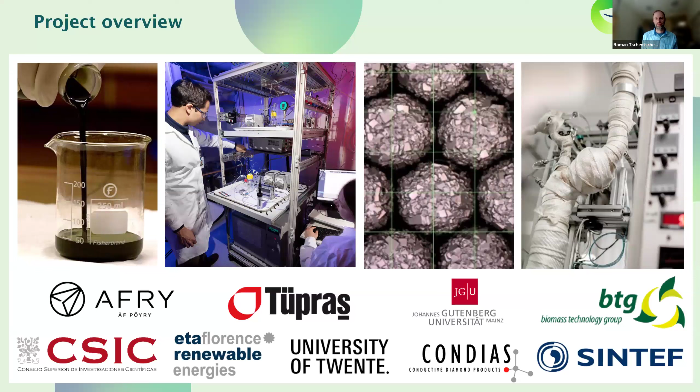In this webinar, we will talk about the last part of the value chain of EBIO. As most of you already know, in this project, we use electrochemical methods to turn bioliquids into fuel precursors, and then we co-process them using refinery technologies into fuels. And we have had 2 webinars in April and May, which were dealing with the bioliquids themselves and with the electrochemical conversion. And today we have the final webinar of this series dealing with the refinery operations and co-processing of

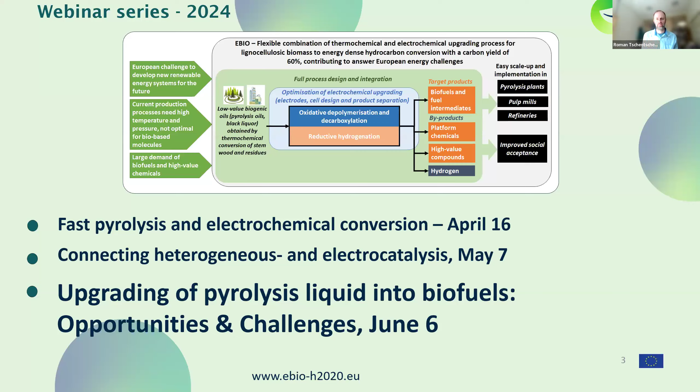those upgraded bioliquids. As Emma already said, we have 2 presentations and 3 speakers. The first presentation will be given by Seda and Can from Tüpras, and then the second one by Yannick from ITQ. And we start with Seda. Please, Seda, the floor is yours.

Thank you, Roman and Emma, for the introduction. Welcome you all to the third webinar of the EBIO project. I am Seda Karahan from Turkish Petroleum Refineries. I am the product owner of the renewable fuels at R&D department. Today, together with my colleague Can Güvenç and our project partner from CSIC-ITQ, Yannick Mathieu, we will have a look at pyrolysis liquids from a biofuel point of view.

Let me give you a brief introduction about Tüpras, which is a refining company producing the energy of Turkey for almost 70 years. Together with over 6,000 employees in 4 different refineries and headquarters in Istanbul and trading office in London, it is the largest enterprise of our country. After its first establishment in 1955 as a public company, its privatization to Koç Group occurred in 2005. By the investments after that point for both modernization and the residue upgrading, which was completed in 2014 in Izmit refinery, today Tüpras has 30 million tons of crude oil processing capacity.

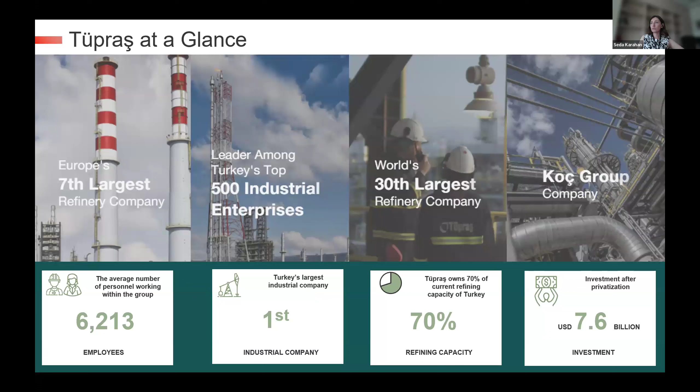For the transportation of crude oil to 4 refineries, which are located in Izmit, Izmir, Batman and Kırıkkale, in addition to the pipelines from Iraq and Bakü-Ceyhan, Tüpras has some subsidiaries, Körfez Ulaştırma and Ditaş, for railway and maritime logistics. OPET is our associate for the distribution of value-added products through 5 different terminals and many stations all over the country. By the trading office established in 2018, our sales limit expanded and we ensured that our products reach 15 countries. And 2 years ago, by holding the shares of ENTEK, which is a zero carbon electricity company, Tüpras took a pioneering step through strategic transformation.

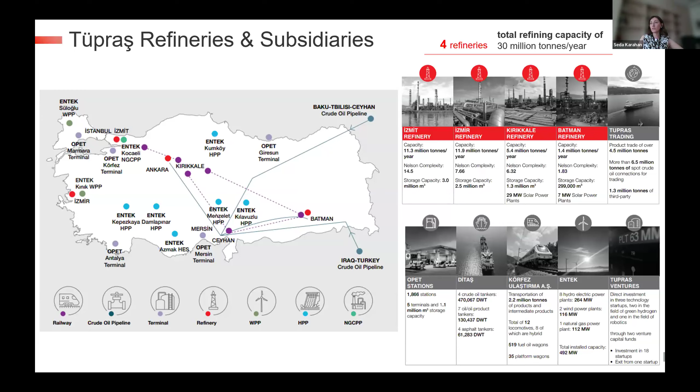In 2021, with the Paris Agreement signed by Turkey and the announced 2053 net zero target, Tüpras initiated its transformation plan by taking steps regarding changing demands and environmental concerns, focusing on 4 main areas, which are biofuels, zero carbon electricity, clean hydrogen, and sustainable refining. Tüpras declared its transformation plan 2 years ago. As the first phase of its investments for biofuels, especially sustainable aviation fuel, Tüpras signed a licensing agreement with UOP Ecofining HEFA technology, which relies on waste vegetable oil and fats. The estimated capacity will be 400,000 tons of feedstock annually.

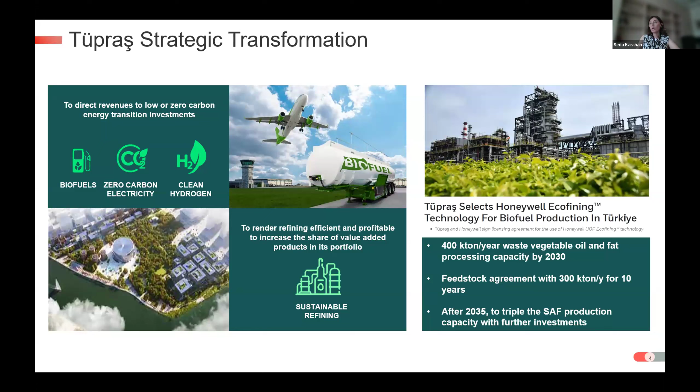We are also looking for some other alternative technologies to triple this SAF production capacity after 2035, taking a role as R&D department for the exploitation of these new routes and the development of new methodologies. At the R&D Center, which is located in Izmit Refinery, there are 68 employees, the majority of them researchers. In addition to biofuels, we have many completed and continuing Horizon-funded projects in the frame of research focuses such as CCUS, circular economy, commercial and digital solutions.

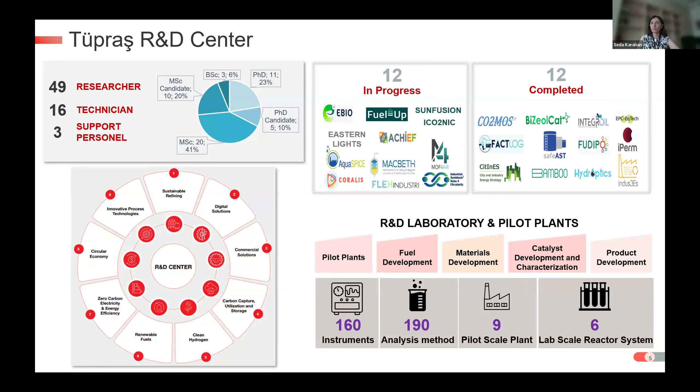Besides EBIO, we initiated another demo scale project, which is Fuel Up, at the beginning of this year, also aiming at the conversion of woody-based pyrolysis liquids into both aviation and marine fuels. And we have 2 newly funded renewable fuel projects relying on microalgae and microbial oil generated from CO2, which are Sunfusion and ICO2NIC.

Here I would like to continue with describing the share of the transportation sector in global GHG emissions. Industrial sectors, including production, energy, and transport, account for over 40% of global GHG emissions. And total global emissions have unfortunately reached 50 billion tons of CO2 equivalent. The transport sector is responsible for 16% of all emissions.

Aviation is one of the 6 hard-to-abate sectors, like cement, steel, plastics, and shipping. Aviation takes part by 2 to 3% for now, and according to the European Commission, by the middle of this century, the demand for flying could increase and the GHG emissions will reach more than 3 times compared to 2005 levels. Although this increase has been temporarily slowed down by the effect of the COVID-19 pandemic, it is recovering very fast. And in the last years, aviation emissions have already reached 80% of the 2019 pre-pandemic peak.

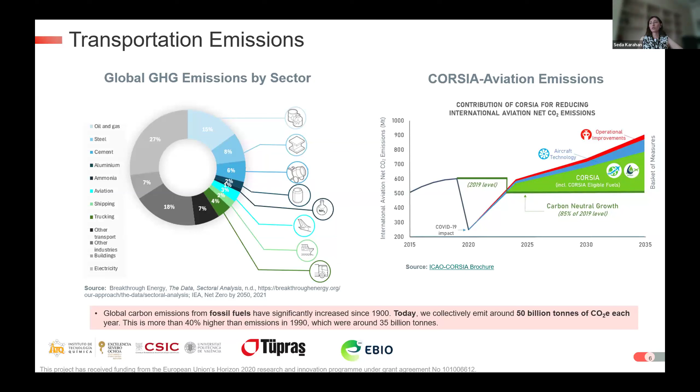According to CORSIA, which is a carbon offsetting and reduction scheme, it takes as the baseline reference 85% of the emissions of 2019. Precautions for aviation can be collected in 3 fields to stabilize the emissions at that level. These are operational improvements, aircraft technologies, and clean fuel technologies. To draw back the emissions to baseline, the estimated contribution of these technological advancements and operational improvements is very limited without sustainable aviation fuels. In addition to sustainable aviation fuel, there are other alternatives like hybrid electric and hydrogen that can pave the way for decarbonization of aviation, but especially for commuter and regional jets.

The reason why batteries are limited to shorter distances is their volumetric energy densities. That's to say, a plane would need more than 50 kilograms of batteries to replace just 1 kilogram of kerosene, which is jet fuel. And they can be used for a maximum range of 500 kilometers to 1,000 kilometers. While the mass energy density of hydrogen is higher than kerosene, liquefaction is required for both safe distribution and storage purposes.

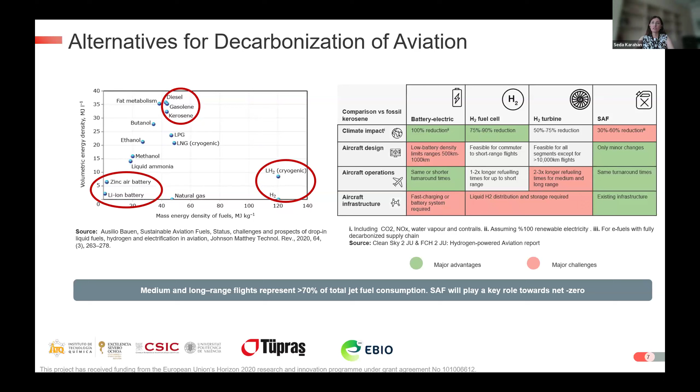On the other hand, SAF is a kind of liquid fuel already, and it is both chemically and physically compatible with its fossil jet counterparts, and therefore it is the most promising way of decarbonization. Also, considering that 70% of jet fuel consumption already comes from medium and long range flights, SAF is the major solution for aviation.

In Europe, pursuing the ambition of being a global leader to accelerate independence from fossil fuels, the European Commission completed the adoption of the Renewable Energy Directive, and the third version entered into force last November. By the new directive setting the targets and obligations in many sectors, the renewable energy use target in the transport sector by 2030 was increased to 29%, or alternatively a 14.5% GHG reduction must be ensured. Although the previous versions covered road and rail transport, now it is extended to all transportation sectors, including aviation and maritime.

Together with a mandate encouraging the use of advanced biofuels from Part A feedstocks, which are mainly non-food biogenic feedstocks. Also, the cap for the use of Part B feedstocks, which are used cooking oil and animal fat, the sources which HEFA relies on. This cap, 1.7%, is retained in this version also.

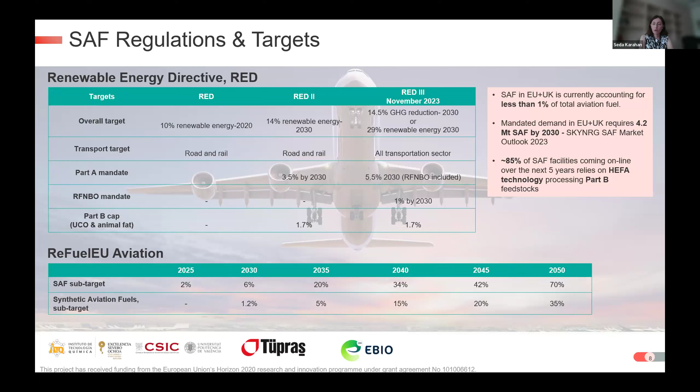The aviation-specific ReFuelEU initiative aims for SAF blends starting with 2% next year and a gradual increase year by year to reach 70% in 2050. While the target sounds very ambitious, the current SAF capacity of the EU and UK is now less than 1% of total aviation fuel. And also the majority of SAF plants coming online over the next 5 years rely on HEFA technology.

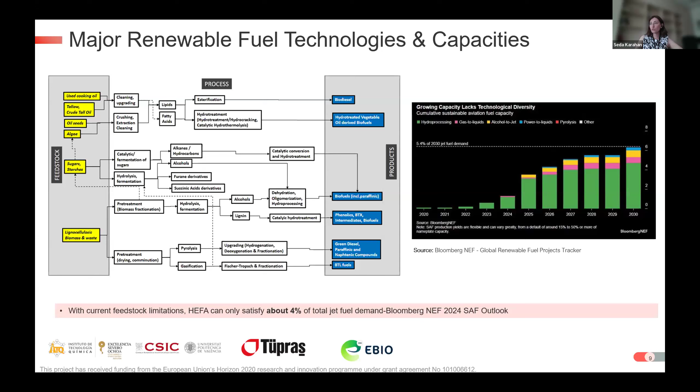To just remember the pyrolysis process, pyrolysis is the thermochemical conversion of biomass into bio-oil, gases, and some solid products, which are called biochar. This biochar can be used either as fertilizer or for some water purification applications, or you can directly use it for the process heat.

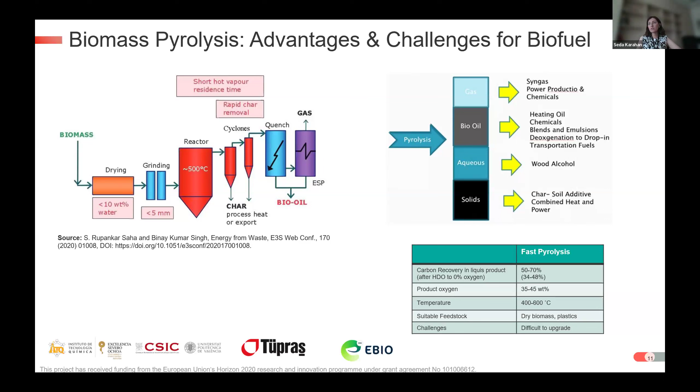When we look at the distribution of the products in fast pyrolysis, the bio-oil proportion is around 40 to 60%. The biochar is around 10 to 15%. And the remaining part is the gases, which are composed of hydrogen, methane, carbon monoxide, and carbon dioxide. A wide range of biomass feedstocks, as I said before, provides flexibility for pyrolysis. And you can also contribute to waste reduction in this way.

Pyrolysis represents a promising pathway, but some challenges remain, and some development activities are required to make these bioliquids more refinery friendly. We should decrease its acidity and oxygen content. Also, due to the high moisture content, it is highly affected by transportation costs. Therefore, construction of pyrolysis plants close to the source becomes an economically much more viable pathway.

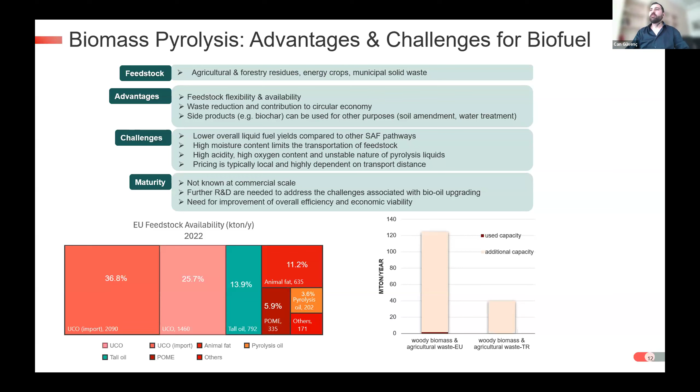No, thank you, Seda. Yes, okay. Also, due to the high... all right. Okay.

Hello, I'm Can Güvenç. I have been working as a researcher at Tüpraş for about 1 year, focusing on renewable fuels and pilot plants. Today, we will discuss some of our work on pyrolysis oil, hydroprocessing units, hydrodeoxygenation reaction, and the EBIO project.

As Seda mentioned, pyrolysis oils have several advantages and challenges. Significant developments in pyrolysis oil technology for bio-oil production date back to the 1980s; these studies have increased significantly in the last decade, and it has become commercial. I will talk about some companies in the field of biomass-based renewable fuel production. First, let's start with Preem Refinery. Preem is in Sweden, and it produces biofuel from materials such as wood chips.

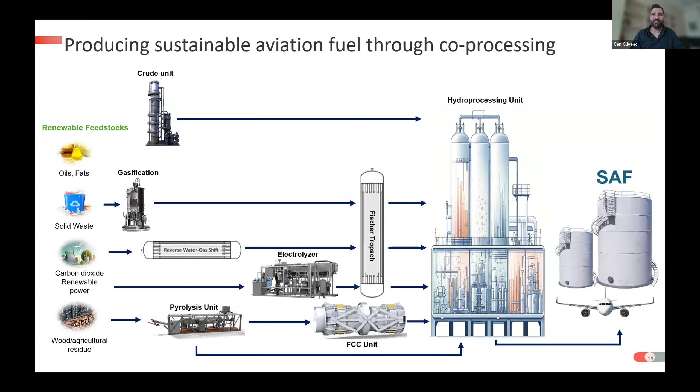Speaking of SAF, let's take a look at the characteristics of SAF fuel, shall we? When we look at the specifications for SAF, we see that co-processing must be done for ASTM D1655. If we want to use this product as jet fuel, we need to reduce total acidity. The final boiling point should also be a maximum of 300 degrees Celsius. The density should be between 775 and 840 kilograms per cubic meter.

And the freezing point, this is another important value. We must meet the maximum freezing point of minus 47 degrees. To meet these properties in pyrolysis oil, we first need to reduce the high oxygen and water content. For this, we can use hydrodeoxygenation reactions. Now, let's explore these reactions.

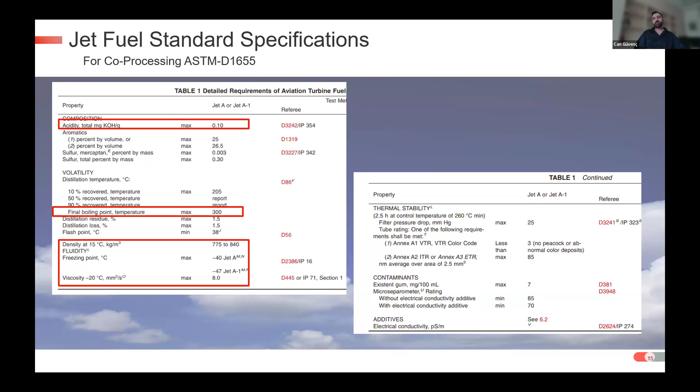These reactions are crucial for converting bio-oil and other renewable feedstocks into valuable fuels and chemicals. In fuel production, they are effective in converting olefins, n-paraffins and isoparaffins. This plays a critical role in determining the quality and performance of the fuel. Why are these molecules important and what do they do? When we talk about olefins, we are talking about more reactive molecules. They are prone to oxidation and polymerization reactions, which can negatively impact fuel stability during storage. I will give an example of this later.

Also, olefins can have higher combustion temperatures, which can increase combustion efficiency, but may also cause more deposit formation at high temperatures. Looking at n-paraffins, n-paraffins generally have low freezing points, which is necessary for jet fuel to be used at high altitudes and low temperatures. Additionally, n-paraffins have high energy density, which increases the fuel's energy efficiency.

Isoparaffins, on the other hand, have a branched structure. Therefore, isoparaffins have low freezing points, which improve cold weather performance. Isoparaffins are more stable and more resistant to oxidation reactions, which increases the long-term storage stability of the fuel. Carefully managing this conversion is critical to optimizing jet fuel performance. It is important to minimize the unwanted effects of olefins while benefiting from the useful properties of n-paraffins and isoparaffins.

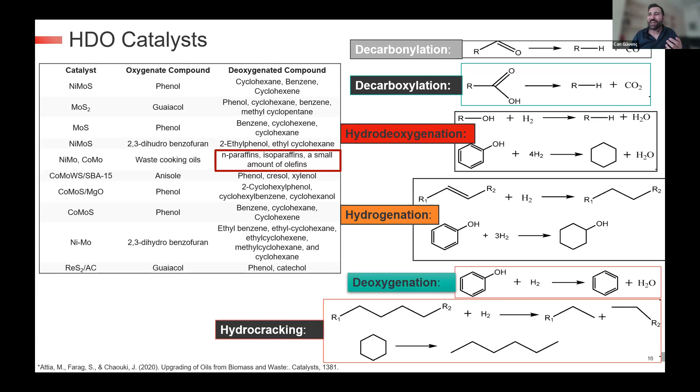All good, but in which system can we implement these reactions? Come closer, let me tell you about the plants we have at Tüpraş. Do you get closer? Don't get too close. If I show too much of the facility, I might lose my job.

The reactions I mentioned can be carried out at our Tüpraş R&D Center, where our pilot plants or facilities include both pilot scale and lab scale systems. I will go through this quickly.

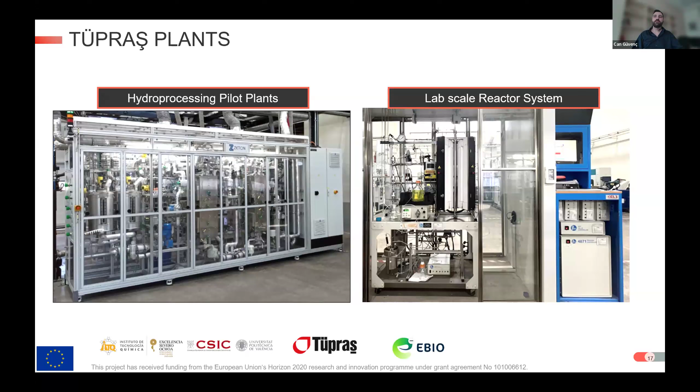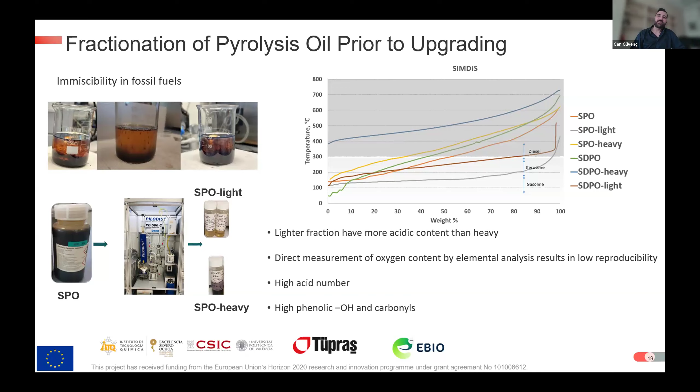I praised the NiMo-containing catalyst a lot to you. We agreed to use this catalyst. We set our reaction temperature to 360 degrees Celsius and pressure to 90 bar. We feed SDPO with hydrogen. By doing this, the reaction becomes a hydroprocessing reaction. This condition will be the same for all the work I will talk about from now.

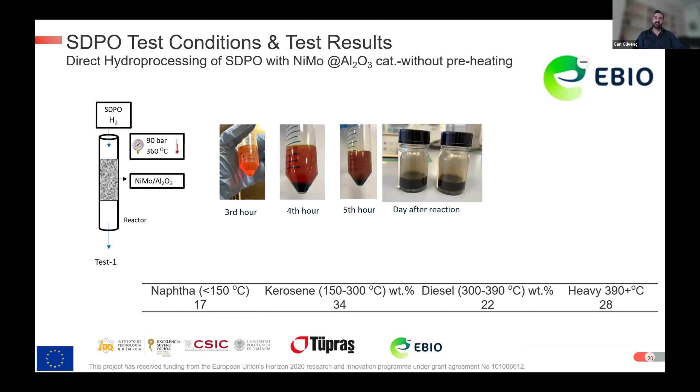We took samples every hour. You can see the colors of the products. They seem a bit dark, don't they? In fact, after waiting a few days, they almost turn black. Earlier, I mentioned olefins. They caused stabilization issues. We think one of the important reasons for this is the high olefin content. Additionally, the products had 28% heavy fraction and low kerosene content. We don't want these results. Therefore, in the next experiment, we changed some parameters.

We thought that if we did preheating, we could reduce stabilization problems. So we added preheating at 200 degrees Celsius to the system. It was helpful. This time, the color of the products is not as dark. It is an orange color. I think it looks cuter, but compared to orange, yellow is a lighter color. This still shows that stabilization issues continue.

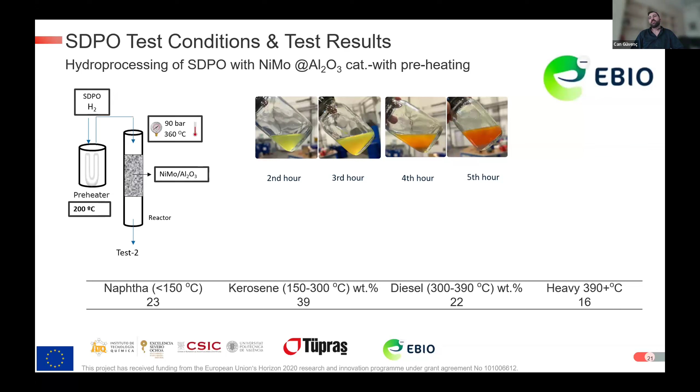The good news is that the oxygen content decreased. The heavy product fraction dropped to 16%. The kerosene content increased to 39%. However, we are still far from jet fuel properties. We need to eliminate the heavy fraction and solve these stabilization problems. We came up with a solution for this. Let me tell you about it.

Yes, fractionation. We separate SDPO into light and heavy fractions up to 325 degrees Celsius. The stabilization problems are due to the high olefin content not found in crude oil. These reactive bonds are unstable and need to be protected from oxygen and light. So we removed the heavy fractions to keep SDPO in the kerosene range.

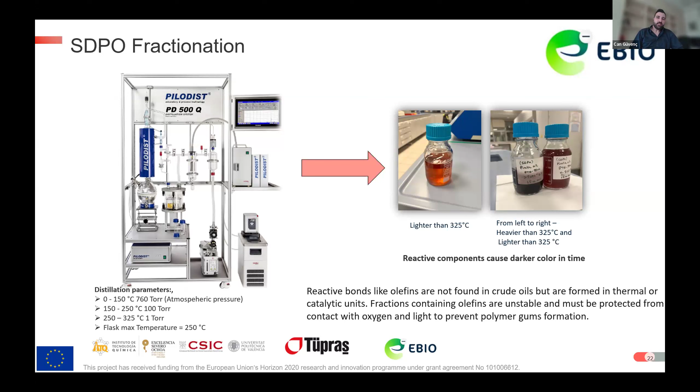Did this work? Let me show you. Yes. Doesn't the product look so clean? You might be wondering if it turns black after waiting. We waited and it doesn't go bad. The analysis results are not bad either. Even at the fourth hour, the oxygen content dropped below 1%. There is no heavy fraction in the product anymore. And the kerosene content reached about 66%.

In conclusion, NiMo/alumina catalysts have given kerosene-like products, a successful result in the hydroprocessing of SDPO. Preheating decreased the oxygen and water content in the products and increased the amount of kerosene. After fractionation of SDPO, heavy cuts were removed. Kerosene and diesel conversion has increased. After the reaction, the oxygen content decreased to less than 1%.

In the future, we aim to analyze the light fraction and focus on the reaction of heavy fractions to detail this study's future. That's it for my presentation today.

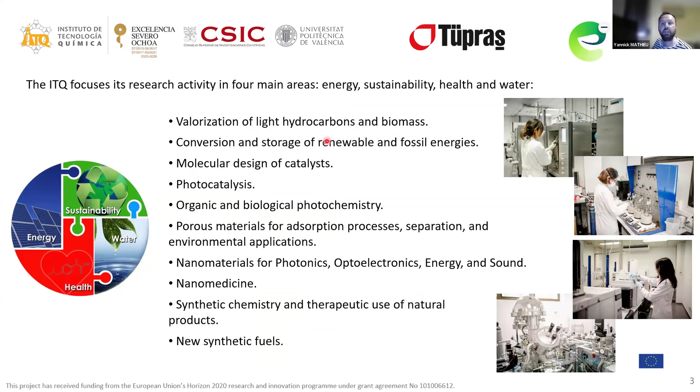So to focus, as I said before, on the possibility to use lignocellulosic biomass to produce liquid fuels, you have different alternatives. One of them is the use of thermochemical processes, such as pyrolysis or hydrothermal liquefaction, to produce an intermediate, which will be the biocrude, but this biocrude doesn't have the properties necessary to be sold directly as commercial liquid fuels. So they have to be upgraded.

To do this upgrading, there is a possibility for refiners to use already existing processes such as hydrotreatment, hydrocracking, or catalytic cracking processes, which we already use for crude oil processing, to improve the quality of this bio-oil to produce commercial liquid fuels.

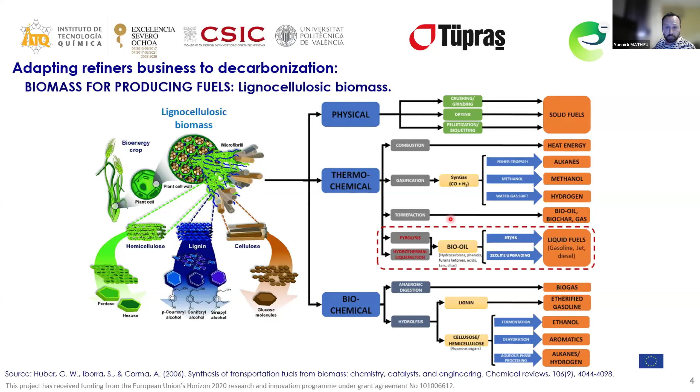What is the problem? The main problem about pyrolysis oil or biocrude coming from hydrothermal liquefaction. The first one is the oxygen content. The oxygen content is quite high for pyrolysis oil, as Khan said, could be something like 40 or 50% of the whole composition of the pyrolysis oil obtained from lignocellulosic biomass. Normally in crude oil, you find less than 1% of oxygen.

The other problem is the ratio between hydrogen and carbon. This one is quite low compared to common crude oil, so you have to do something to increase this atomic ratio. All of this implies quite low energy content inside pyrolysis oil and biocrude from HTL, lower than the one normally obtained in crude oil. So this is why you need a deep upgrading to obtain something more similar to crude oil, and after to obtain commercial products such as gasoline, kerosene, and diesel to be commercialized.

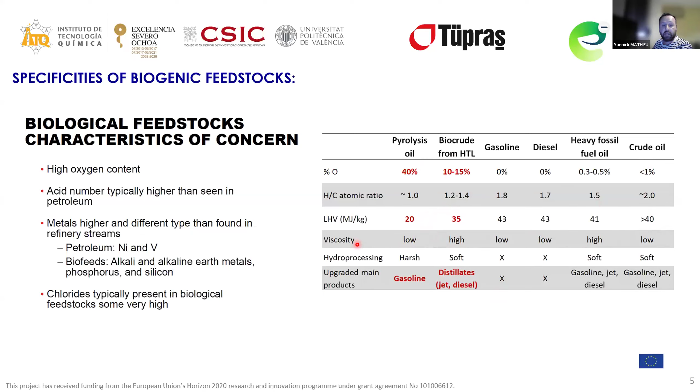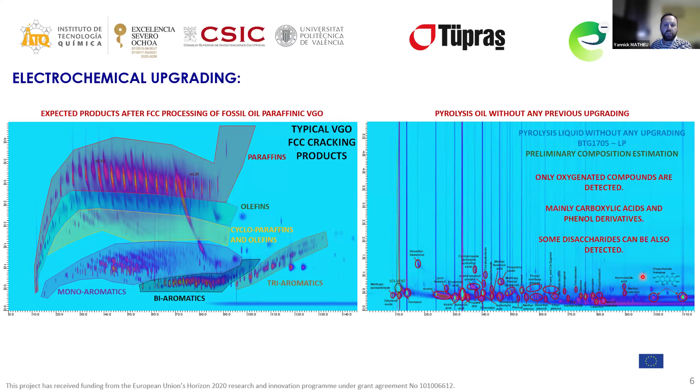These products can bring some problems in processes such as hydrotreatment or catalytic cracking, because these heavy products will end up as coke and will provoke faster deactivation of the catalyst, giving a huge upset of the process operation.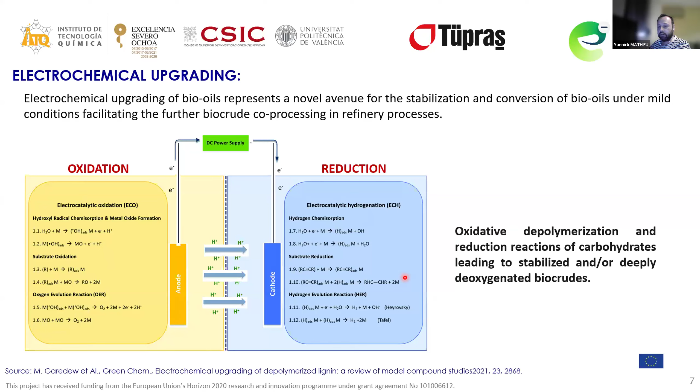So in EBIO, the idea is to use first an electrochemical upgrading, which has the advantage that at the same time you can do oxidation and reduction operations on the pyrolysis oil. On one side, you can try to depolymerize as much as possible the polymers still remaining inside the pyrolysis oil. On the other side, you can start upgrading and removing heteroatoms such as oxygenated compounds, to obtain a much more friendly pyrolysis oil, which will be much easier to process in other processes.

So here is what you get after upgrading. We did different upgrading grades in this project. After upgrading, you can see that the obtained pyrolysis oils are much more similar to standard hydrocarbon streams. We already see the appearance of some paraffins, olefins, and also aromatics. And we see a huge removal of carboxylic acids, alcohols, aldehydes, and a partial removal of phenol derivatives. We do different grades of upgrading, and we use these products to see the impact on FCC co-processing.

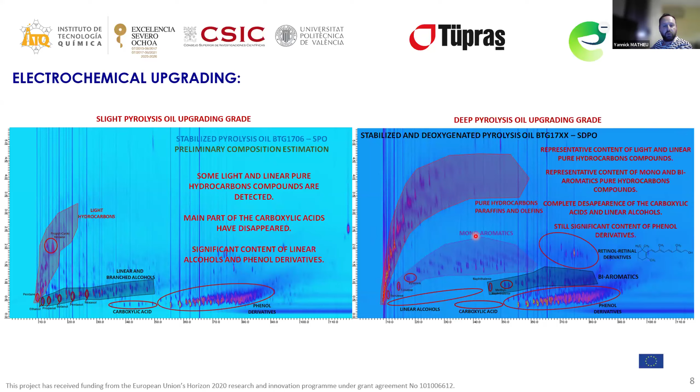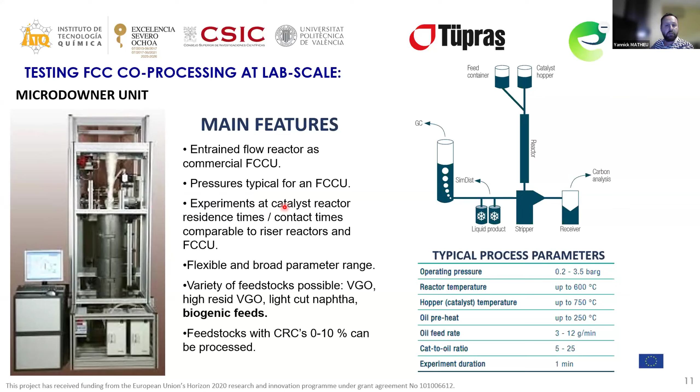So here what we did is take a commercial vacuum gas oil and also a commercial catalyst, which is a USY catalyst, a Y catalyst, equilibrium catalyst provided by Tüpras, so coming directly from real commercial FCC plants, and we set different parameters such as the temperature and the residence time, and we played with different catalyst to oil ratios, to have an evolution of the conversion of the biocrude.

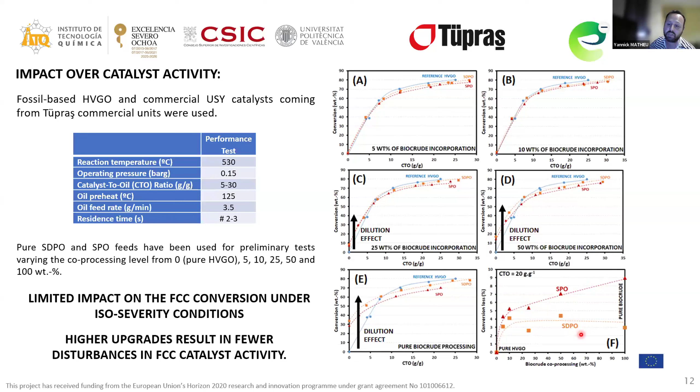And for this, we did different blends, starting from the pure vacuum gas oil, and we introduced an increasing quantity of biocrude inside. The first point is to see the impact of this incorporation on the activity of the catalyst during FCC processing. So we saw that at very low incorporation levels of 5, 10, or 25%, we have very little impact on the overall conversion of the FCC. We start to see a higher impact at higher levels, but it's still quite controlled, meaning that the electrochemical upgrading does a great job in this case. You can see some difference, and it's better to work with the more upgraded biocrude than with the less upgraded biocrude.

Concerning selectivity of products, we saw that the incorporation of biocrude inside FCC involves a decrease of gas production. So it's good news, because it makes sense to put the whole biocrude directly inside FCC. It's not necessary to only put the higher boiling point hydrocarbons inside, because we are not losing too much product as dry gas. And we can see that at low incorporation levels, we have very limited impact on the different product selectivities, such as gasoline, kerosene, and diesel LCO here. And we start to have more important impact at higher blending levels.

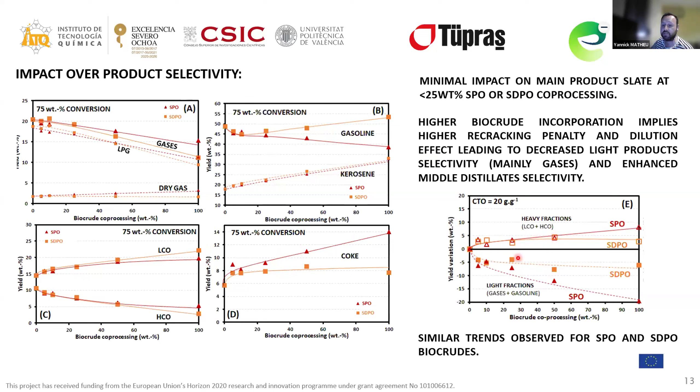This is because at higher blending levels we are producing more coke due to the biocrude, and this coke has an effect on the recracking activity of the catalyst, meaning that we are obtaining more heavy fraction at the end of the FCC co-processing and less light fractions. To give you an idea of what happens to oxygen during FCC co-processing, here you have some yields of the water produced, CO and CO2, and we saw that the main part of the deoxygenation takes place through dehydration.

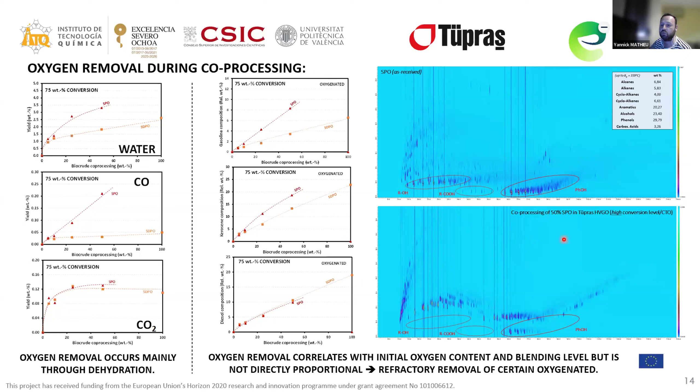If you take a look at the products obtained after cracking, here you have the starting SPO biocrude and the obtained products after co-processing. I think here it's at 50% of SPO in the co-processing. We can see that we have quite easy removal of oxygenated compounds such as alcohols and carboxylic acids, but phenolic compounds are refractory and not removed very efficiently.

The point is that we have an accumulation of oxygenated compounds, mainly phenolic derivatives, which can represent, with SDPO, up to 5% in the case of the gasoline and 20% in the case of the kerosene.

So even if in Europe you don't have any special legislation about the content of oxygen in this kind of product, we think it will be better to try to remove as much as possible these phenolic compounds, because they can bring some issues with corrosion and deposits in fuel systems, can reduce the lubricity, and can also have an impact on the emissions of thermal motors.